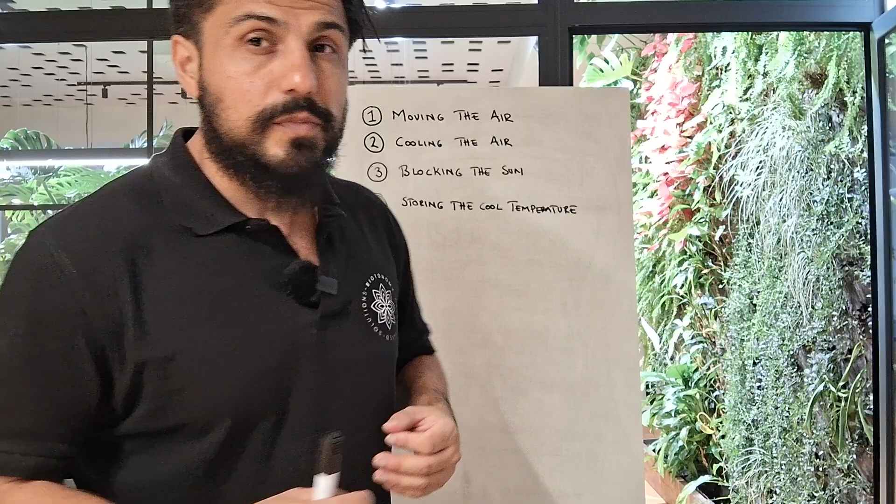The first thing we need to do in our design is design the building in a way that air can move. In conventional buildings, we use fans and ventilation to push the movement of air towards where we want it. But there's actually a natural way of moving air. So point number 1 is what I call moving the air. How do we move the air without depending on electricity and fuel?

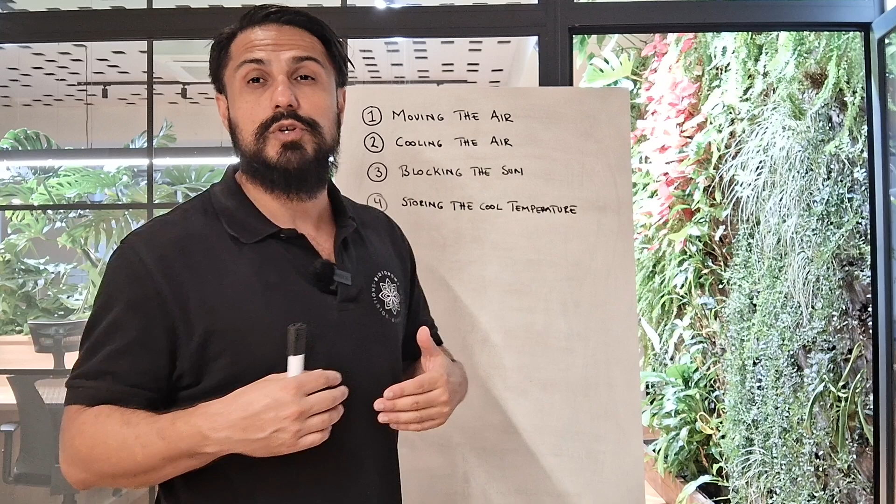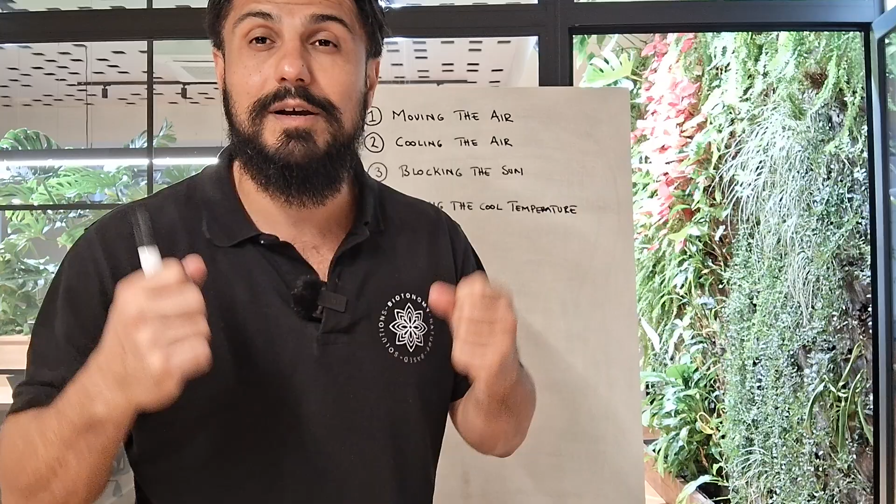The second thing we need to design is how do we cool that air that we're about to move. In conventional buildings, that air is cooled using fuel or electricity, so when it enters the building it is cool. I'm going to show you how you can do that completely naturally without using any electricity or fuel.

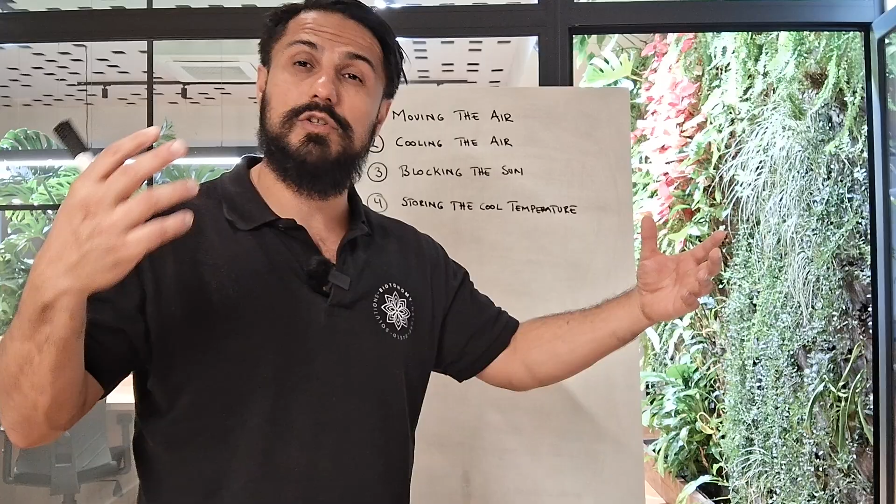Then we're also going to talk about how we design the building to actually block the sun during summer, because it's not only about cooling the air, it's also about minimizing solar intake during the hot seasons. So how do we design the building to do that?

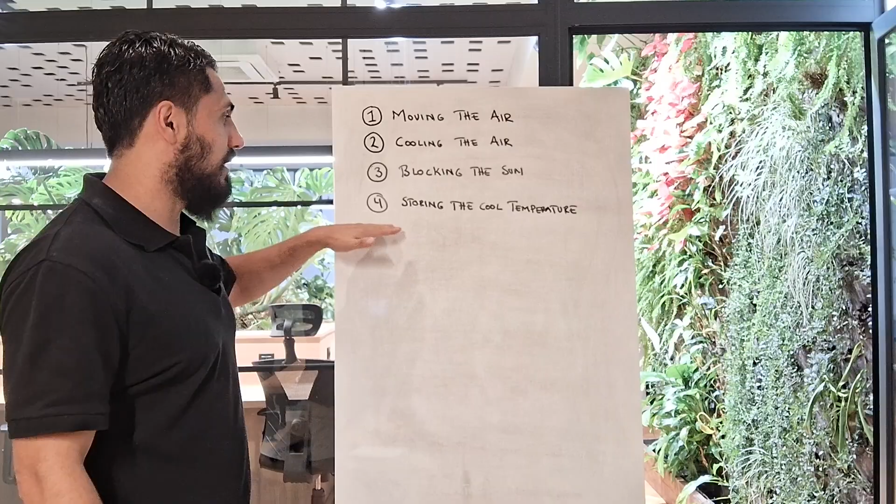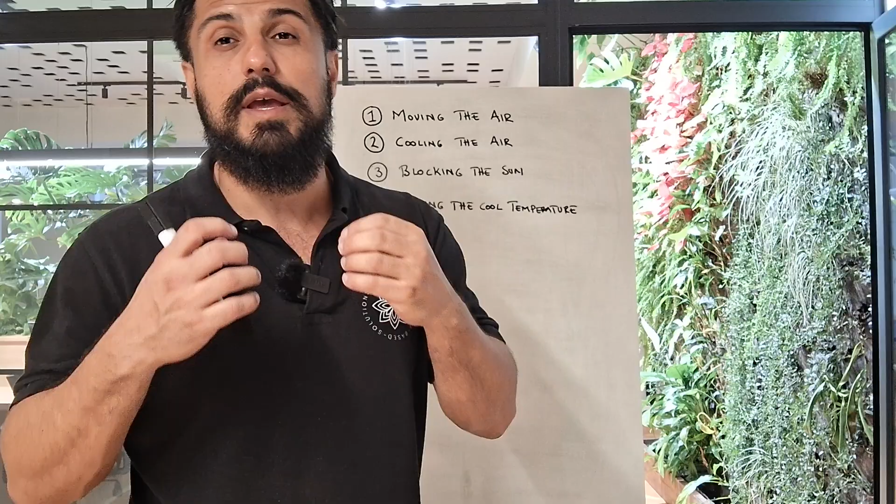And the 4th strategy is how do we store those cool temperatures that the building is now producing. If we don't store it, then we are constantly going to need to produce it.

So I'm going to show you a combination of using these 4 strategies in a building so you can completely cool it naturally. Let's dive into it.

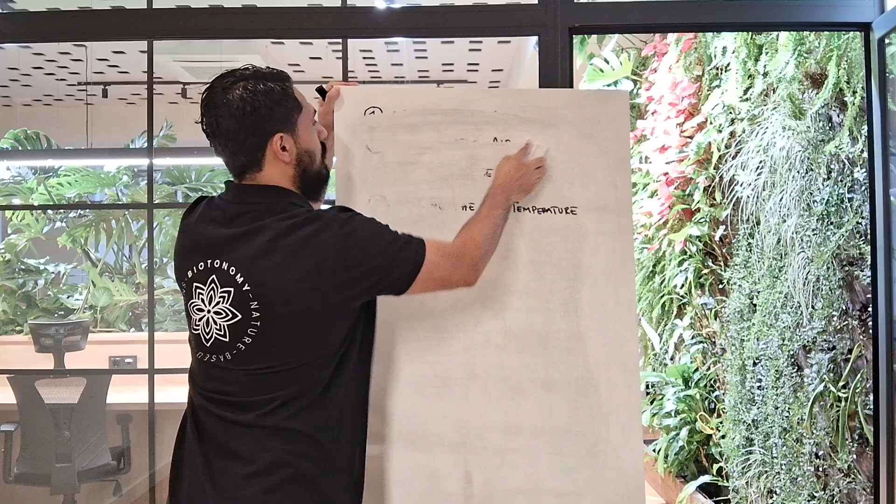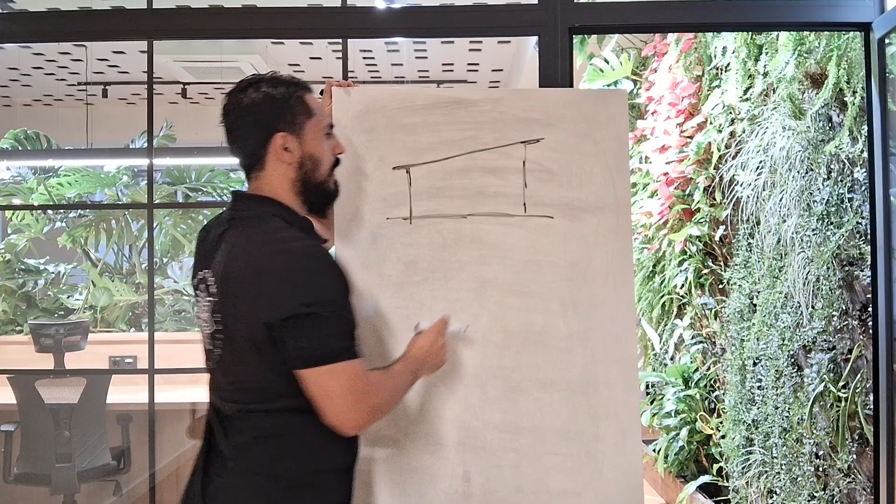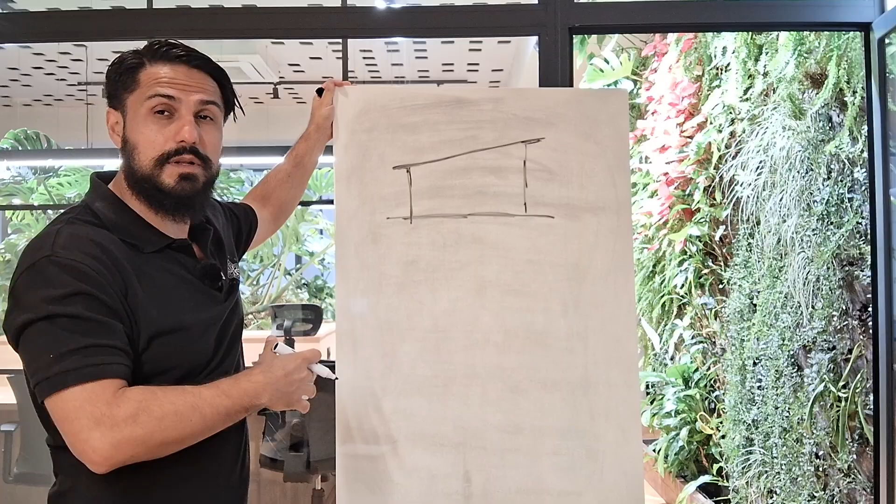Let me remove this so I can show you in a design. Okay, so let's take a building that, for example, has this shape. We do a simple 1-story building, and these strategies that I'm going to show you can be used in urban high-rise buildings in different shapes, but I'm just going to show you the concepts.

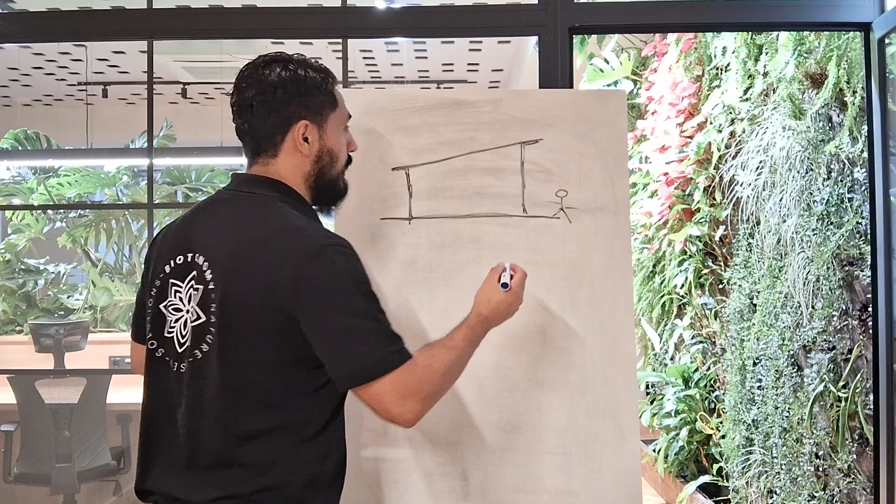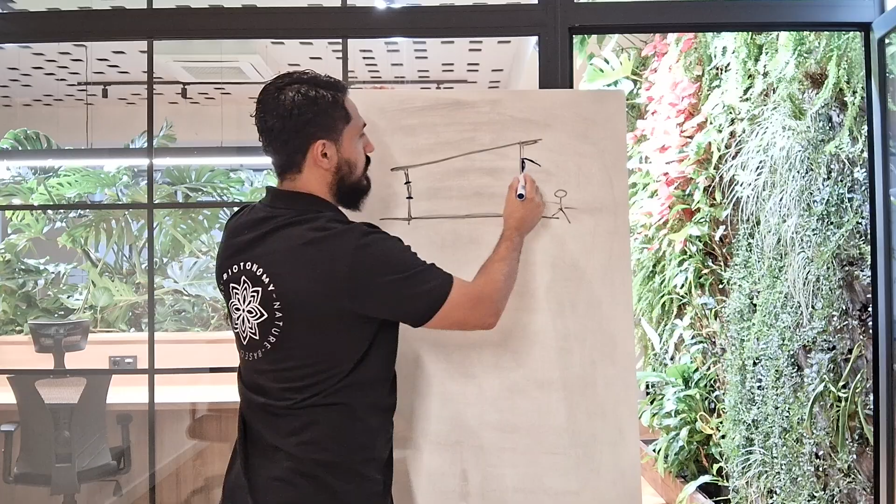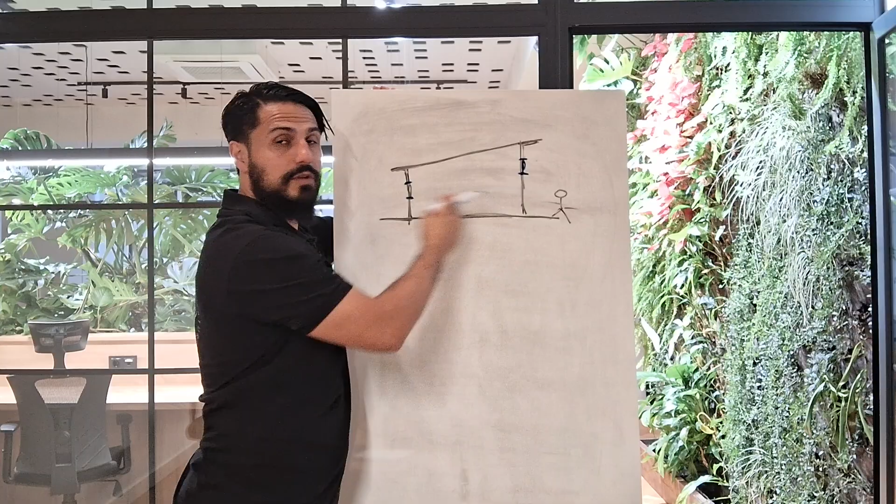So normally you would have windows in a building. If you have experience in a room or a house, if you open a window like this, and you have another window here as well on the other side, I'll just do it like this.

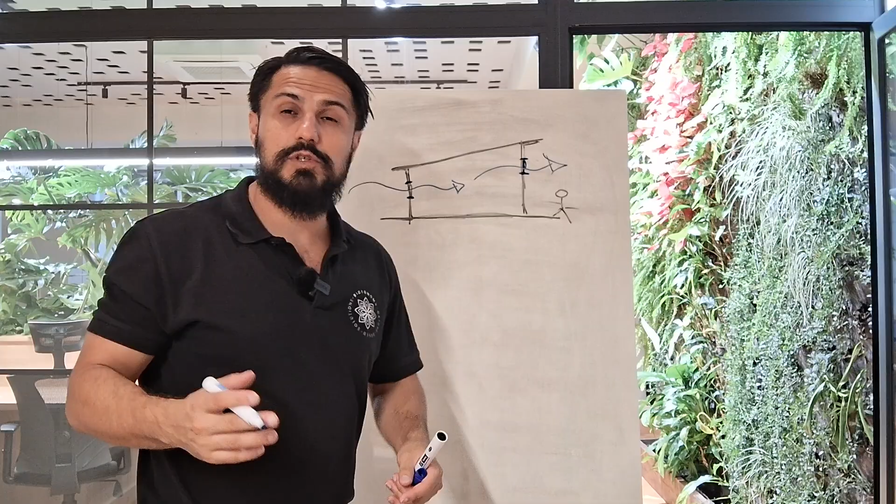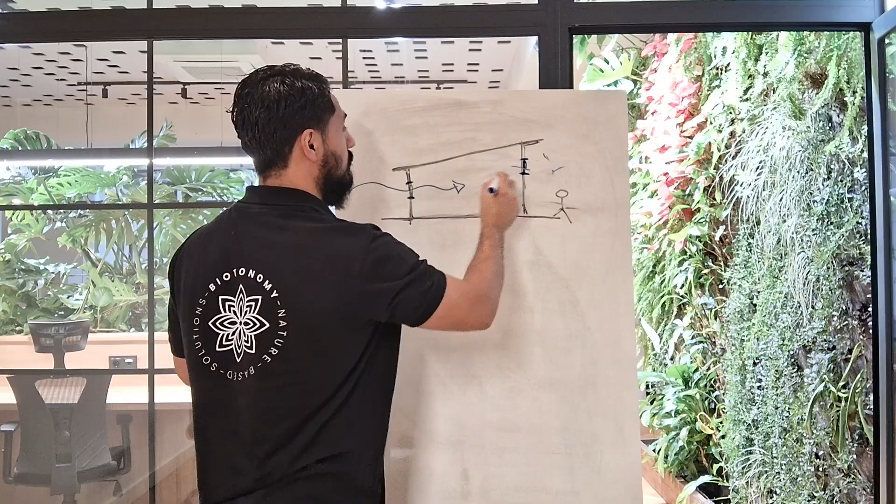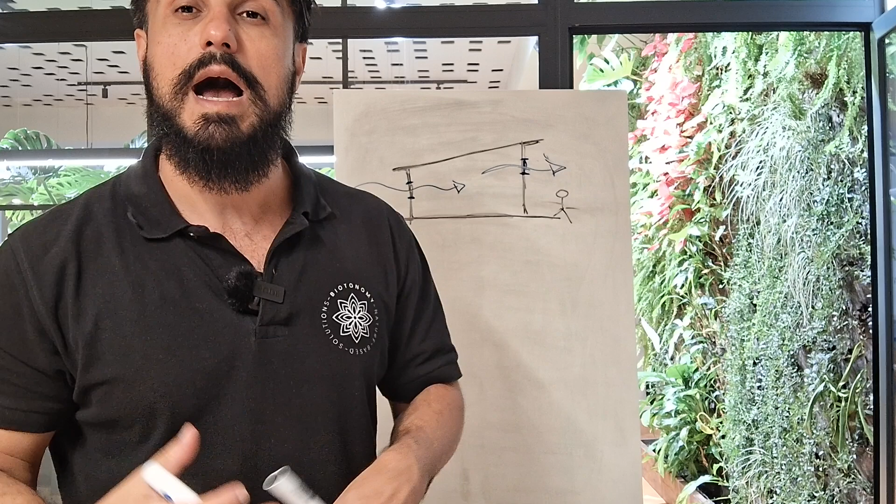If you've had this experience, opening a window on either side of the building, what happens? You get air flowing through your building, so it kind of feels like a breeze. Now that is, in simple terms, called natural ventilation. It's actually physics, because if you only open one, you don't get air to pass through your building, so you don't feel the breeze like that. So in order to make the air move, we need to have this in mind when designing: how do we create an opening on one side, and an opening on the other side, so that when we open these two, we have air able to pass through our buildings.

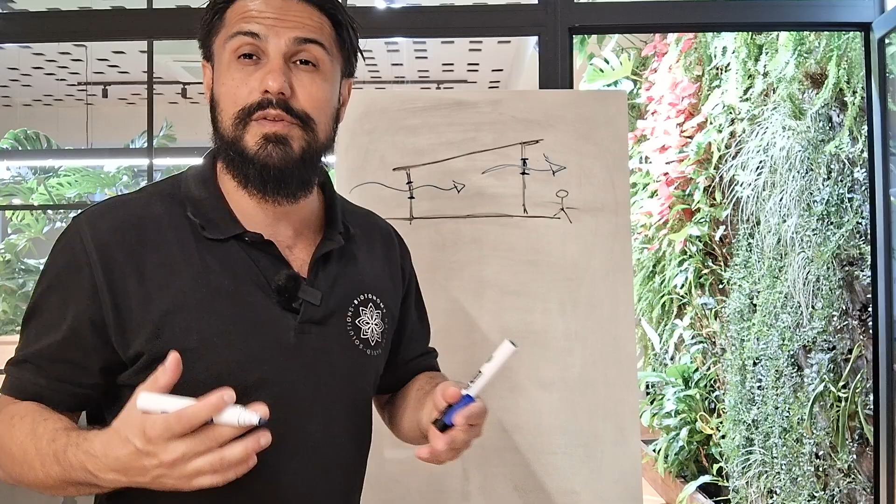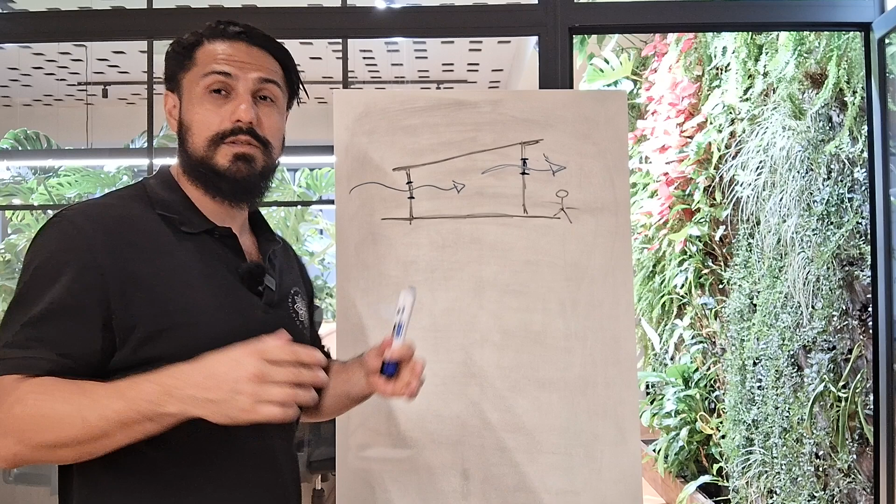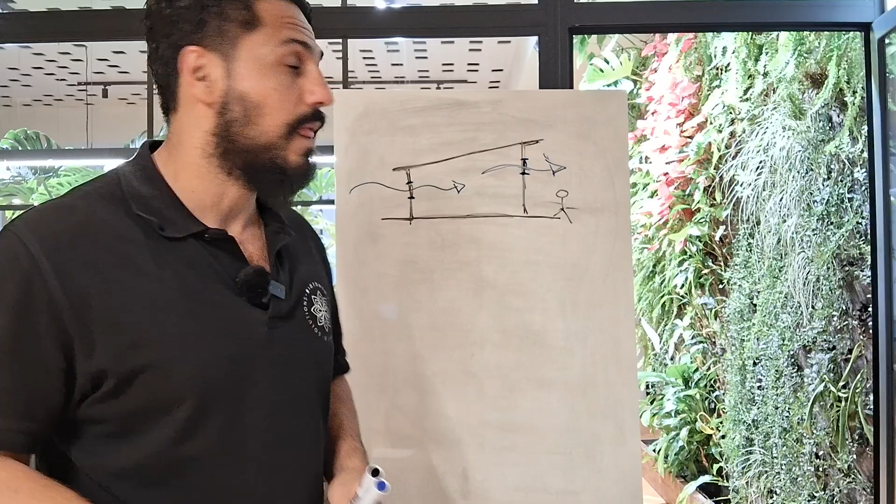Can you imagine that 99% of architecture just fails on this basic concept of having air flowing through the building so we make it breathable? So that's number one, how to make the air move. Very basic, very simple. You need to have this in mind when doing your floor planning, so you really think about where to put the openings. You cannot just put openings because of beautiful views or natural light, you also need to have in mind how do we create air movement throughout the building.

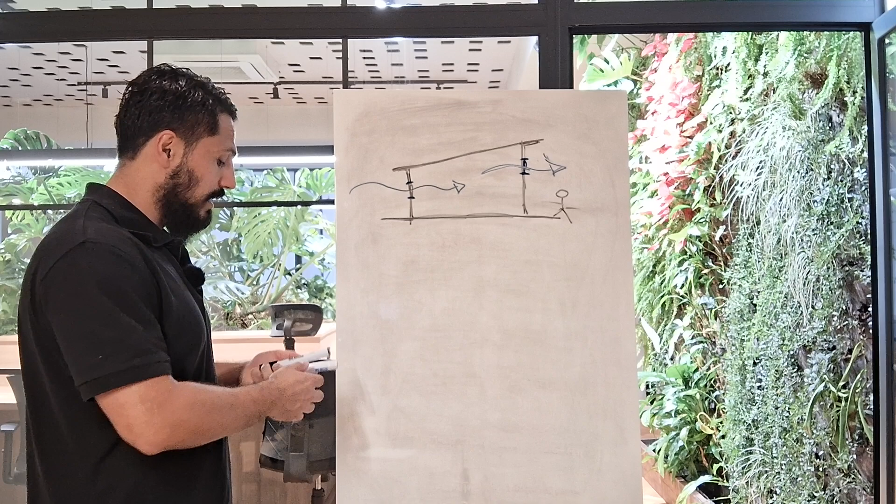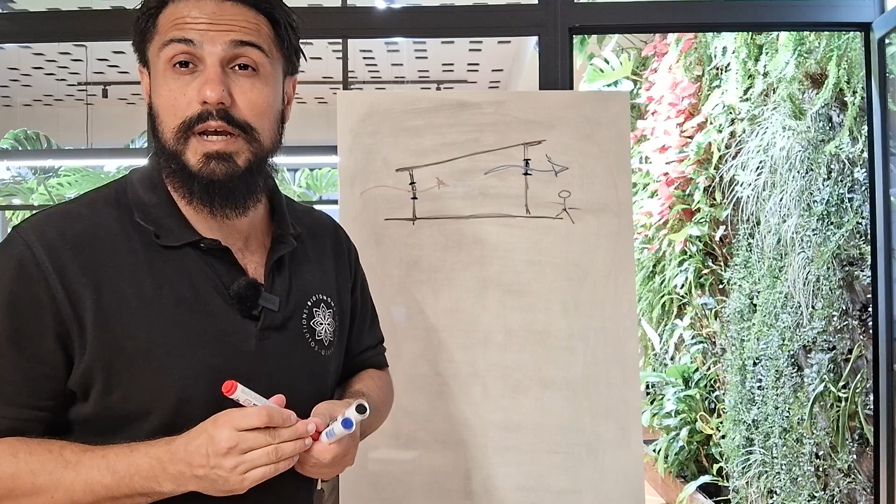Now let's look into how do we cool this air, because in summer, this heat and this wind, when it enters, it's not going to enter with comfortable temperatures. It will enter hot, and in fact it will overheat your building, and you don't want that. You want your building to stay cool.

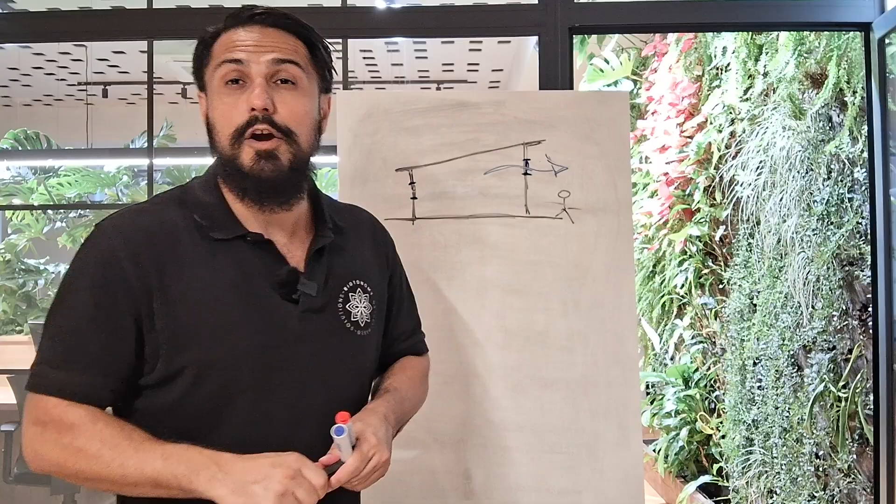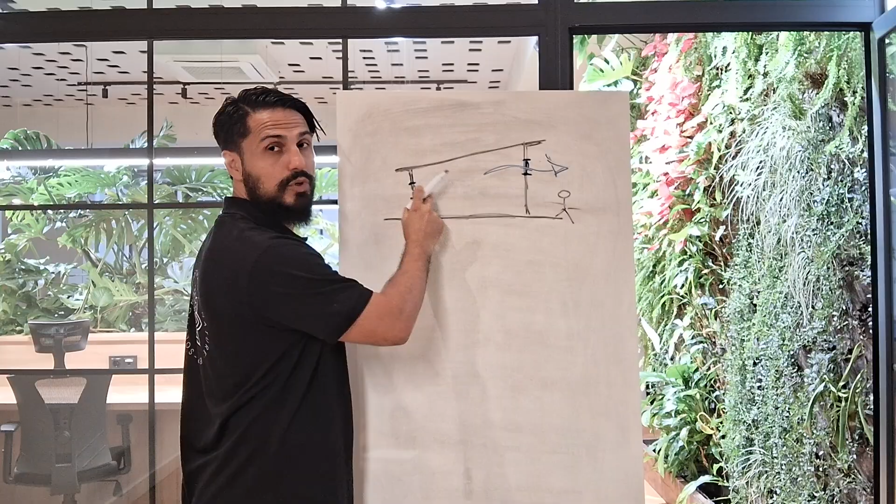So there is a way to cool the air, and it's called earth tubes. If you've never heard of this concept, it's a way of using the cool temperatures underneath the earth to cool the air. So instead of the air having to come from a window, what we can do is place what we call cooling tunnels underneath the ground, and you only need to go about 3 to 4 meters underneath the ground.

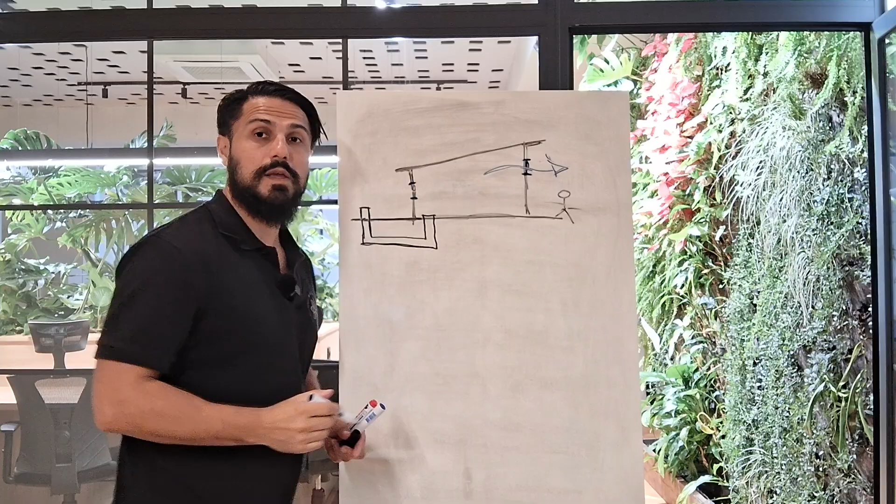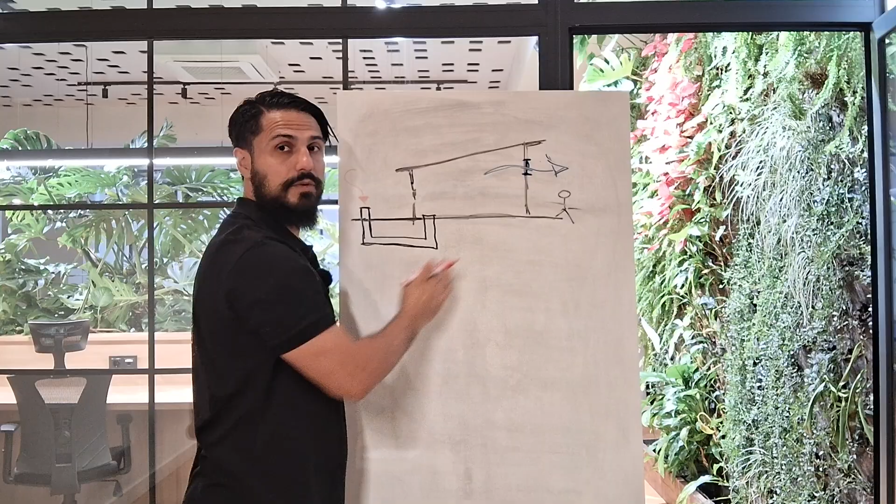So what happens is that when the hot air in summer passes by here - now, before I explain how to cool it, remember we still have this opening here. So when you open this window, air is going to be pulled from here, going through the building. So we've already achieved natural convection, because we have one opening here and another opening there.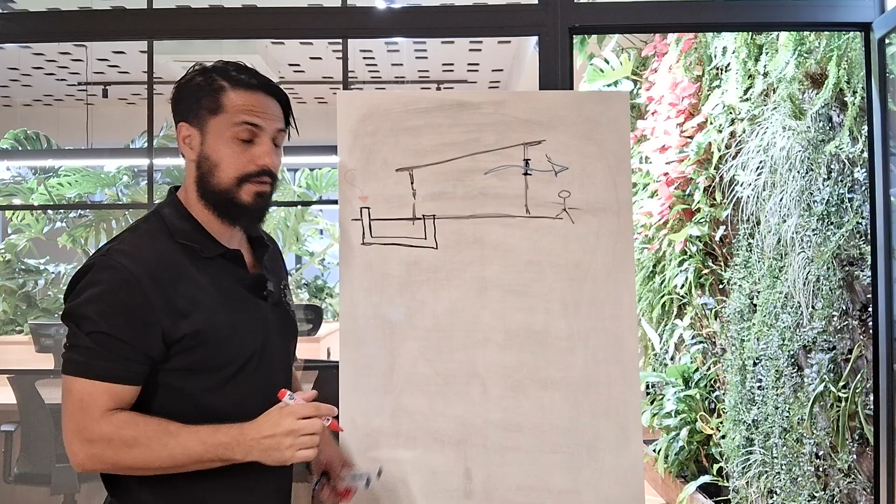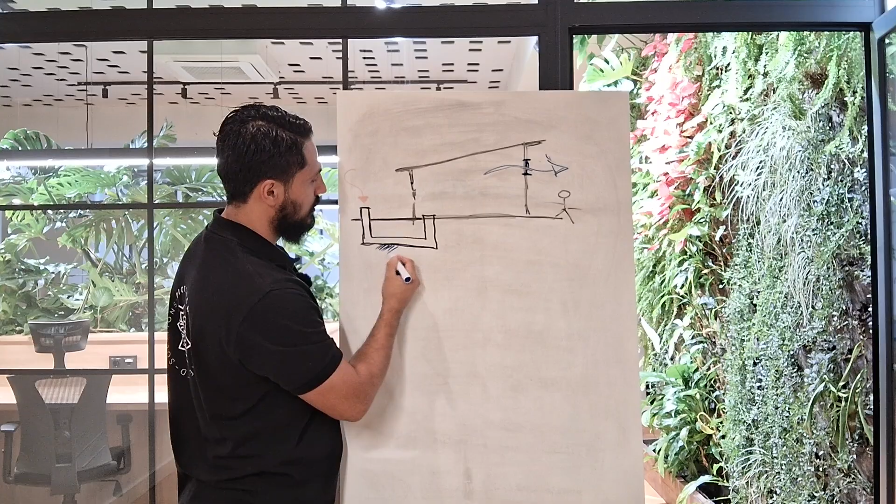Now, because we are 3 to 4 meters underneath the ground, the temperatures around the tube are actually cool, because the sun is not able to penetrate that deep. So naturally, when you dig down, the temperatures are cooled at 3 to 4 meters. The only thing the sun can heat is the top part of the soil, which stays warm because the sun hits it, but the rest is actually cool.

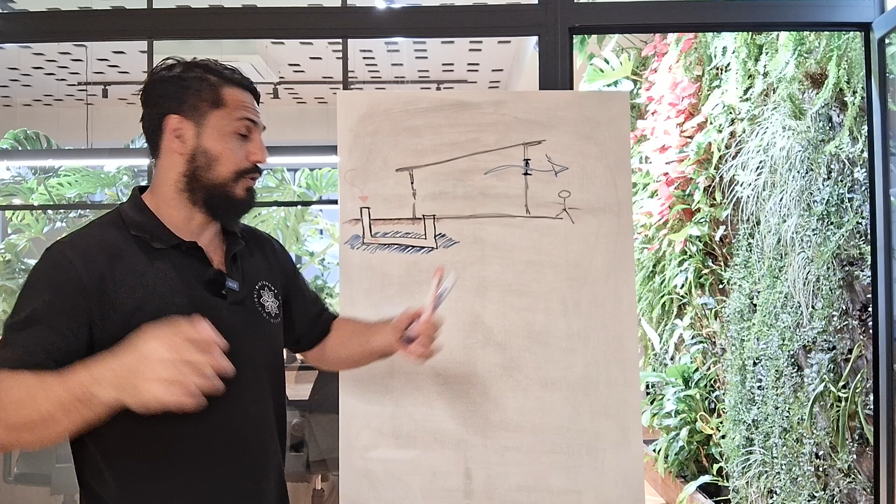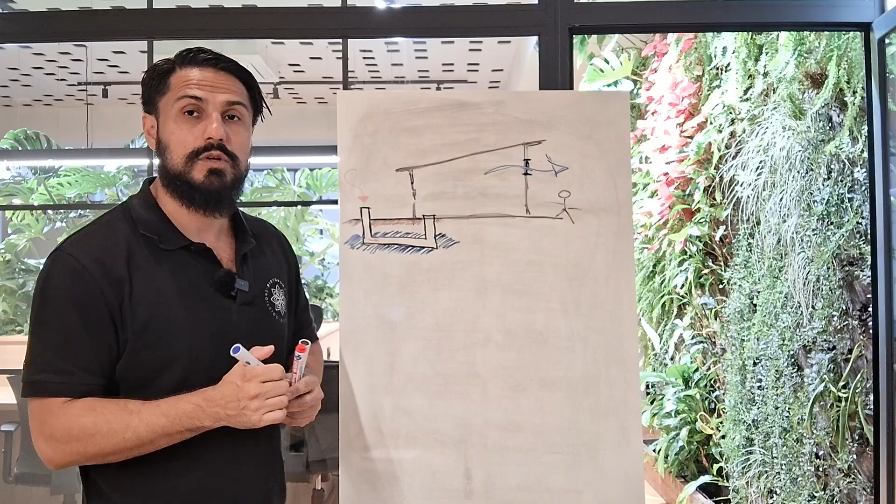So what happens is that as soon as this hot air reaches the lower point, it starts releasing its temperature. Why? Because based on the laws of physics, heat always moves towards cold. So the air that enters here in the cold area becomes cool because it starts releasing its temperature towards the cool area. And then eventually, when it comes into the building, ta-da, it's cool.

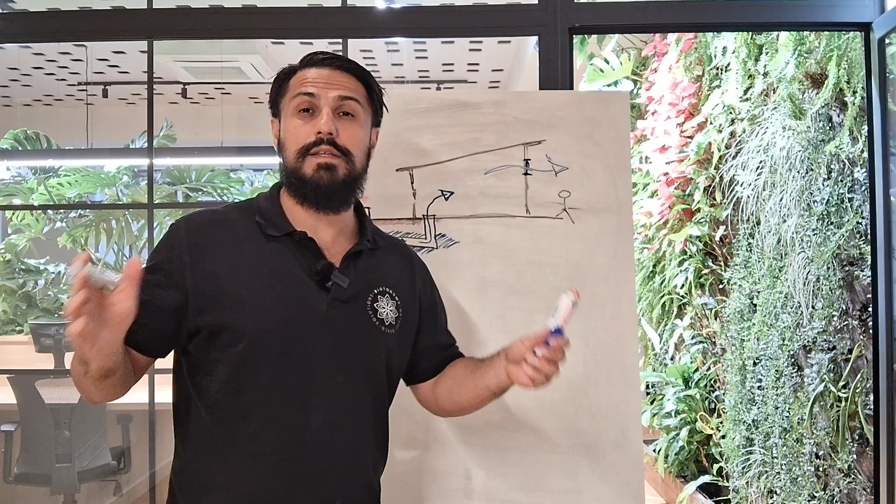It can come in at 19, 20, 22, or 23 degrees maximum, based on our experience. So now you've basically learned how to move the air by creating two openings on either side of your design, and how to cool that hot air during summer.

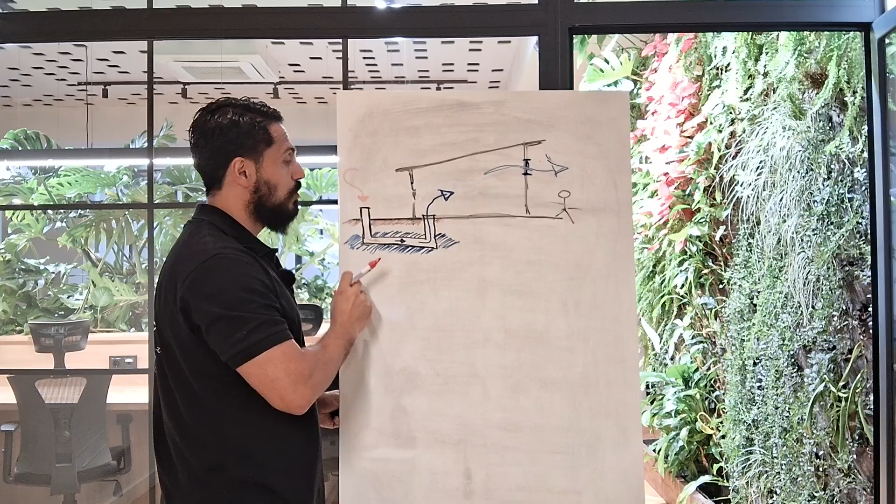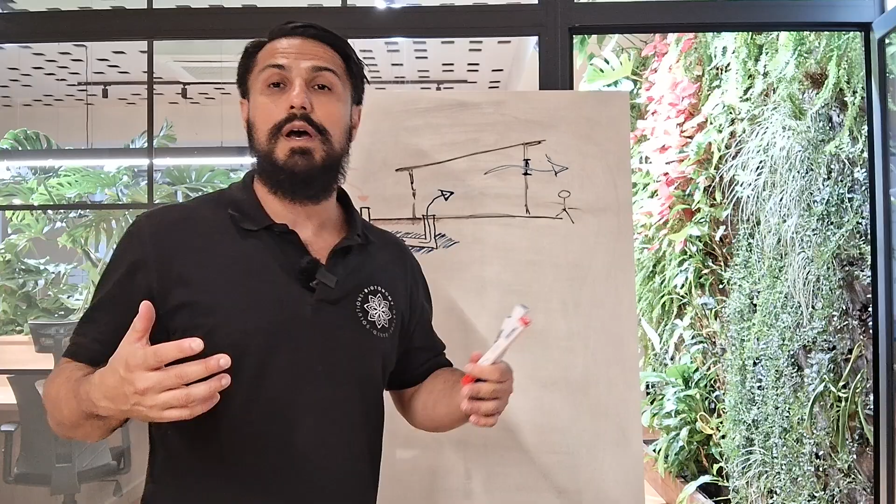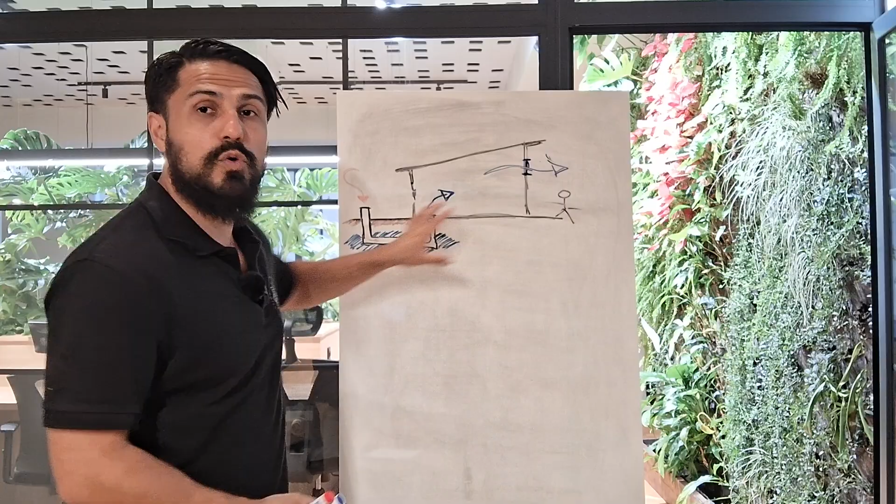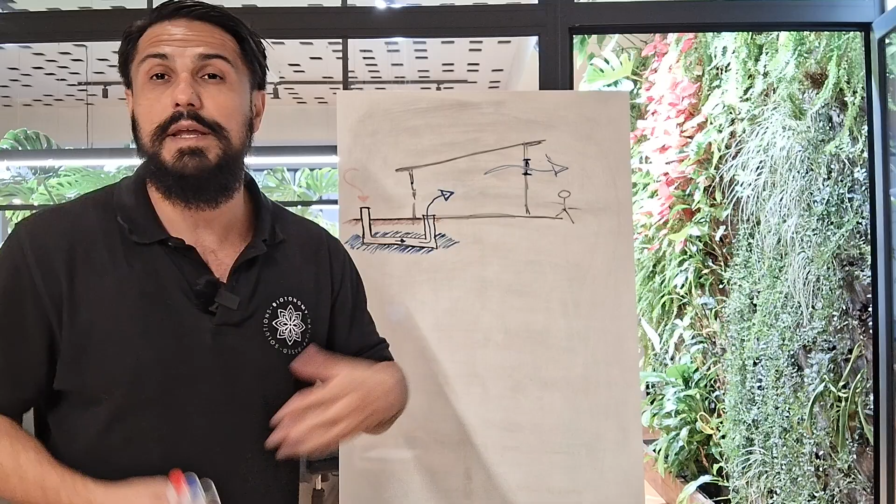So just by doing this, you've created a natural air conditioning system, because normally this whole process of moving the air and cooling the air requires electricity and mechanical components like fans, and they have a lifespan. They can have a 10 to 20 year lifespan depending on what products you're using, and then eventually they need to be maintained and repaired.

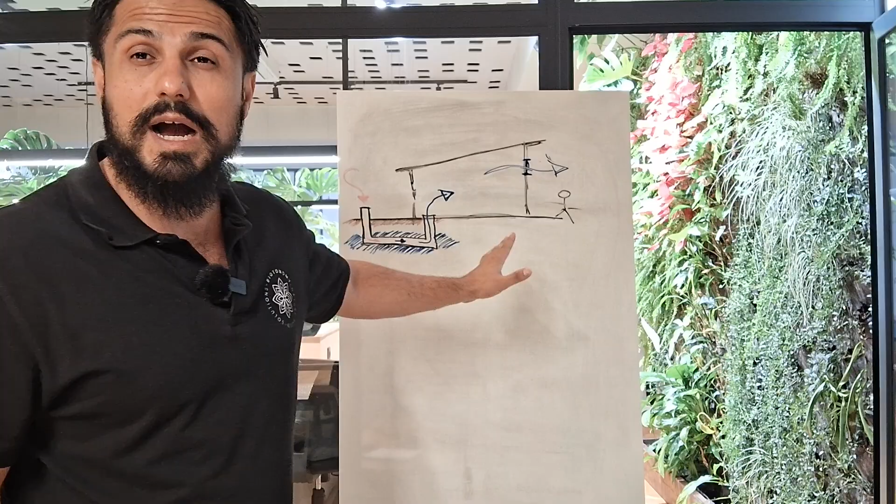But this is actually an ancient way of cooling buildings, and these systems were installed almost 1,000 years ago, and they still exist today. There are cities in the world where you can see these systems installed at a very large scale, still working after so many years. So this is nothing new - it's just lost knowledge that architects have forgotten, because most architects and engineers went to university, and there they were taught how to use air conditioning and fans. They were never taught how to use physics to cool the air. So now you know that, and you're already ahead of most designers out there.

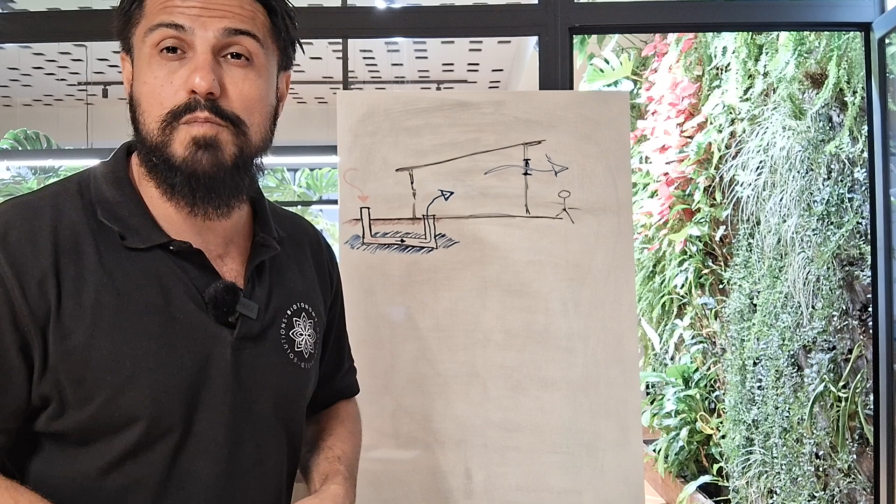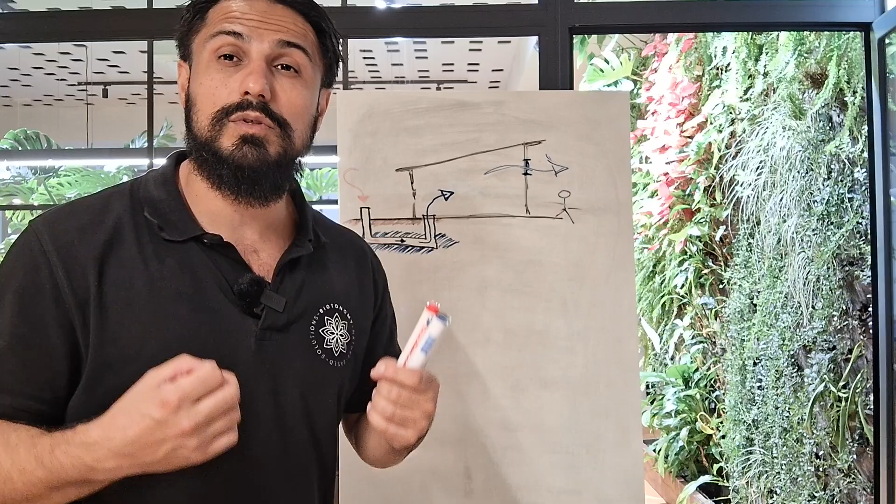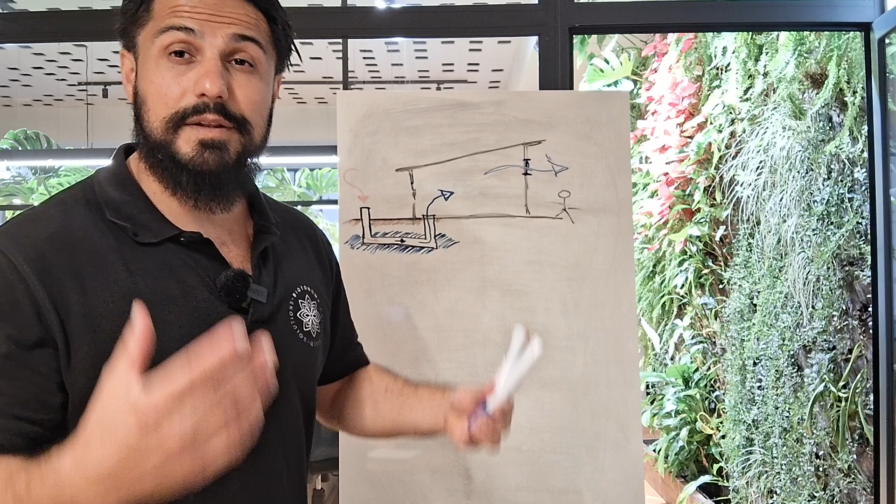Now, the third thing we want to keep in mind to make sure this is working is that during summer, we need to make sure we don't bring too much sun inside of our building, because on one side we're trying to cool it with the air, and on the other side, we need to make sure the sun isn't disrupting this process.

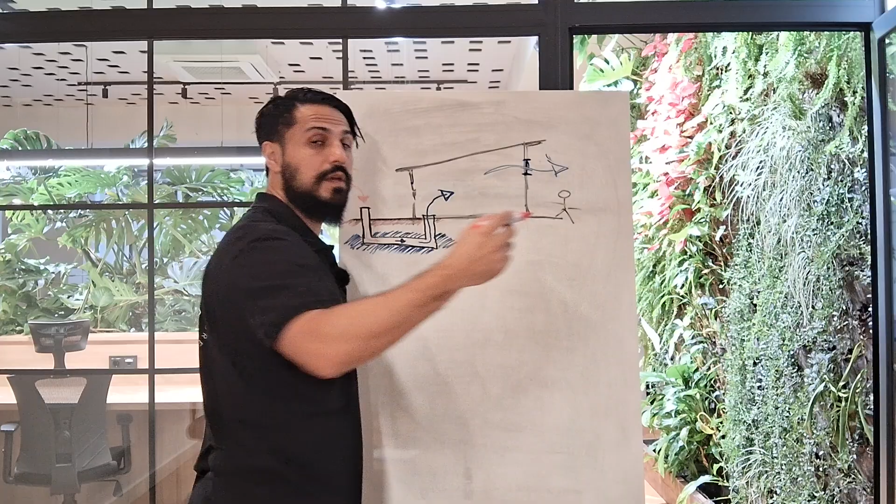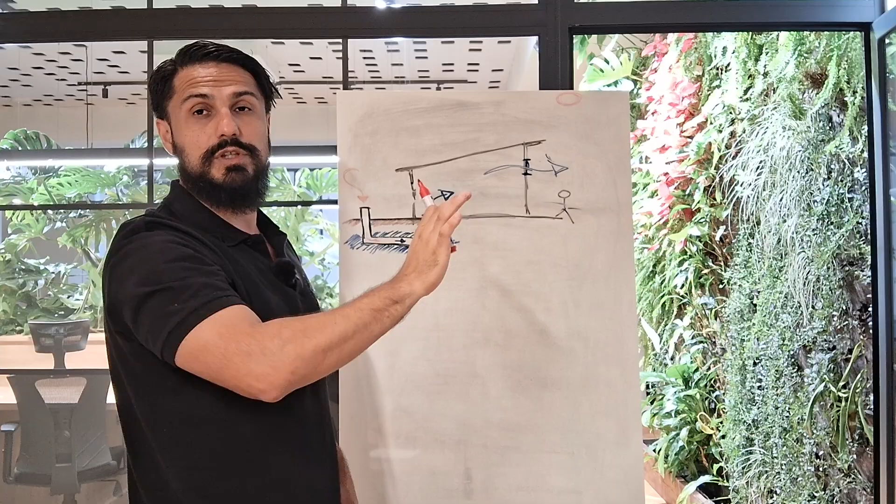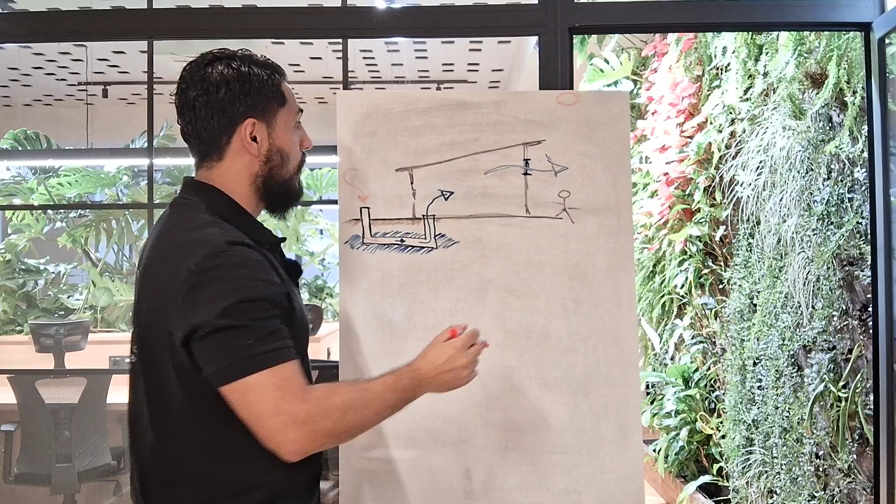The sun in summertime normally has a higher angle, somewhere here, while in winter the sun is lower, depending where you are in the world, but it normally comes into the building in this direction. If this side of the building faces the sun - which in the northern hemisphere is south, and in the southern hemisphere is north - then the sun will be getting into our building like this.

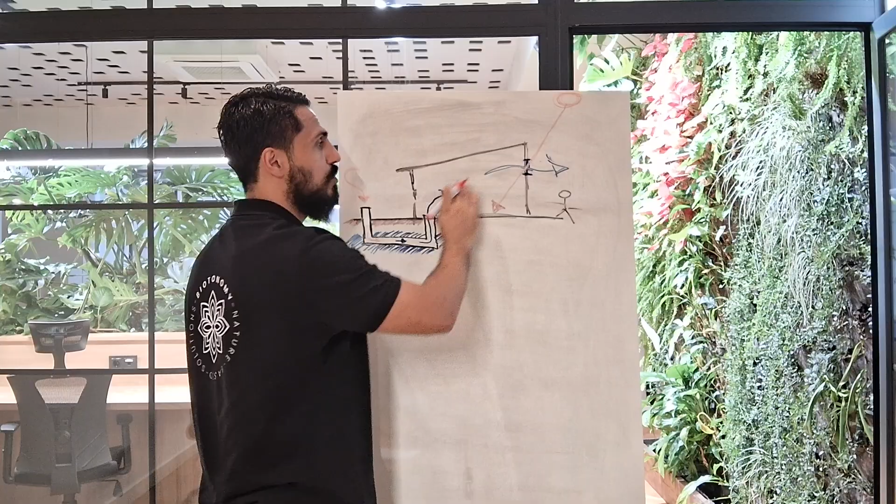Now there is a conflict here, because from one point you have created cool air to come inside of the building, and then from another side you have the sun heating up that air. So now your cooling system doesn't work, right?

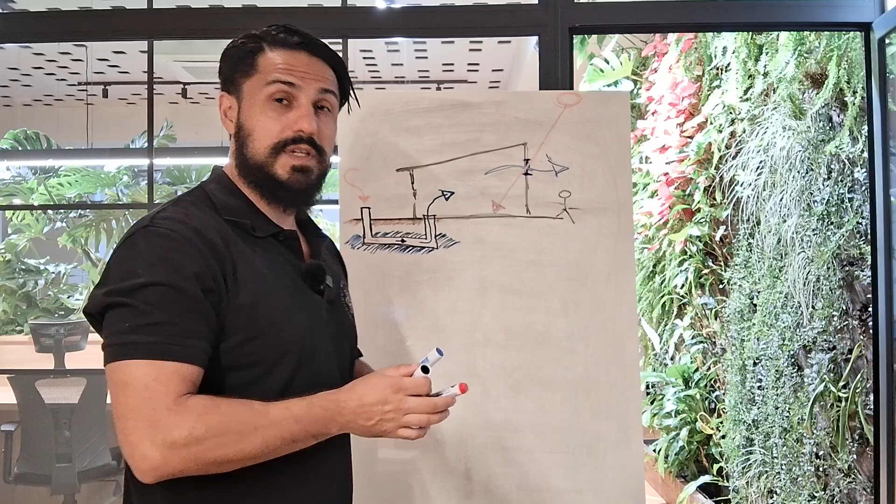So what you need to do is design your building in a way—and this is very simple to do today with today's technology and 3D modeling software—to make sure that the sun cannot enter during the hot seasons.

So all you have to do is figure out, for example, your roof here. How far do you need to extend your roof to block that sun? And you see, if we extend it like I did there, well, now the sun is not able to enter. It will basically just hit your roof, and everything beneath it will stay in shade.

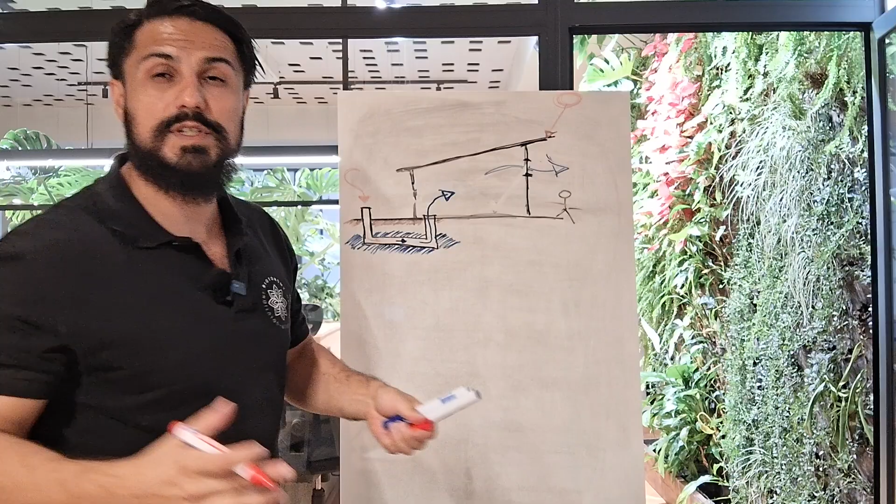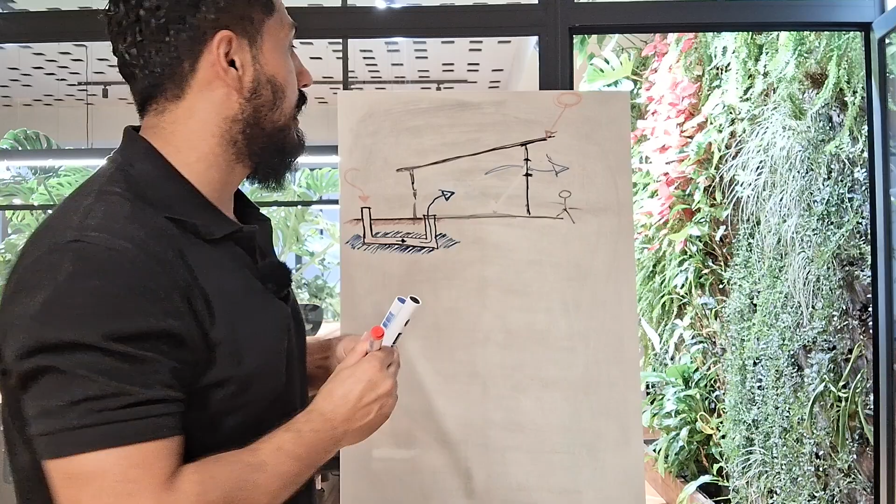That's a huge improvement in terms of thermal comfort, because the sun brings a lot of degrees inside. So just by being able to design the building correctly, we make sure that we don't overheat it with the sun.

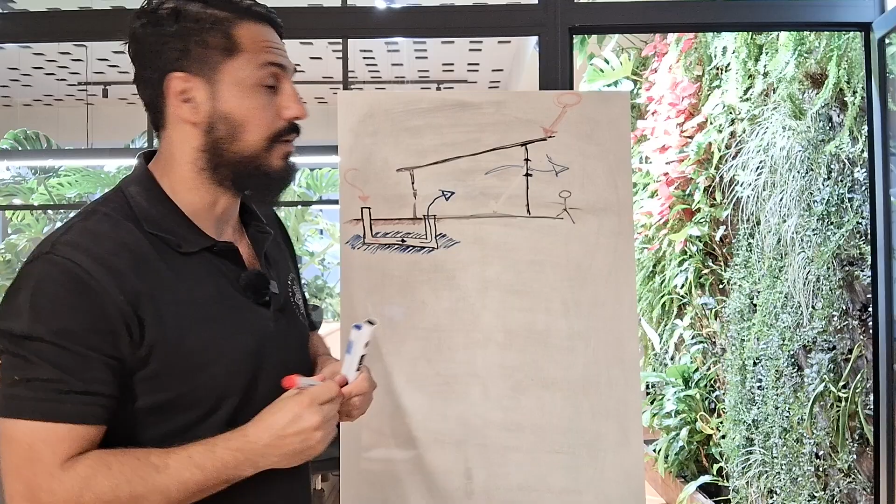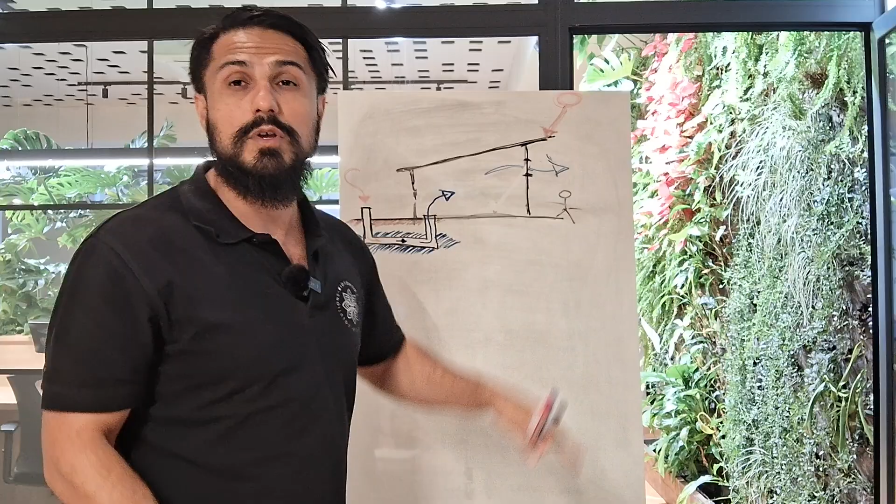So now we've achieved to keep our building in shade during summer. We've achieved to take the hot air from outside, cool it, and bring it inside. So now we should be good, right? Now we have cool temperatures in there.

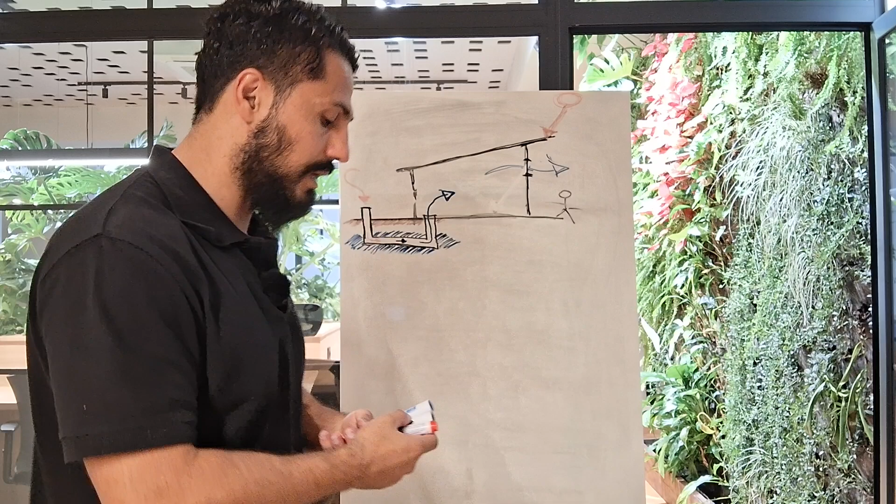Not really—there's one more thing missing, which is storing that temperature. Because eventually, during night, you also want to make sure—maybe you want to close your windows—that your building continues to stay cool throughout the entire day and night. So what you need to do is integrate a storage, a way to store this temperature.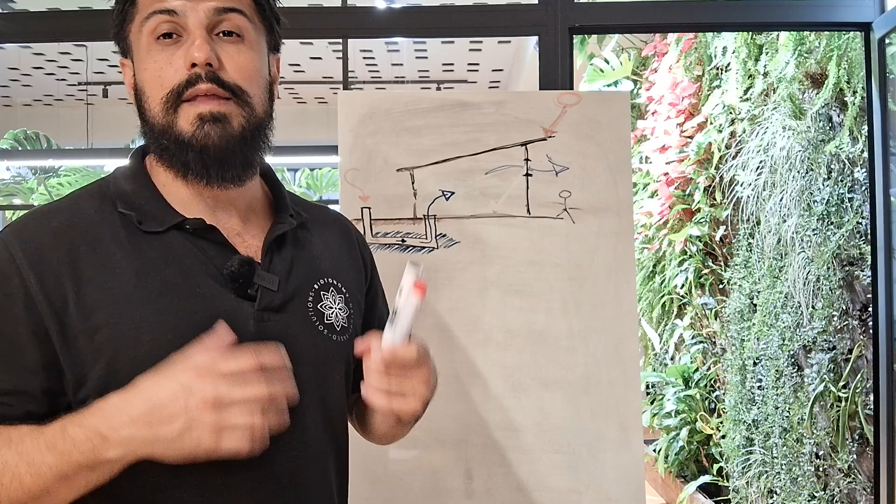And the way people have done this for many years, for thousands of years, is by using a concept that is called thermal mass. Thermal mass is basically nature's way of storing temperatures. You can store both warm temperatures and cool temperatures.

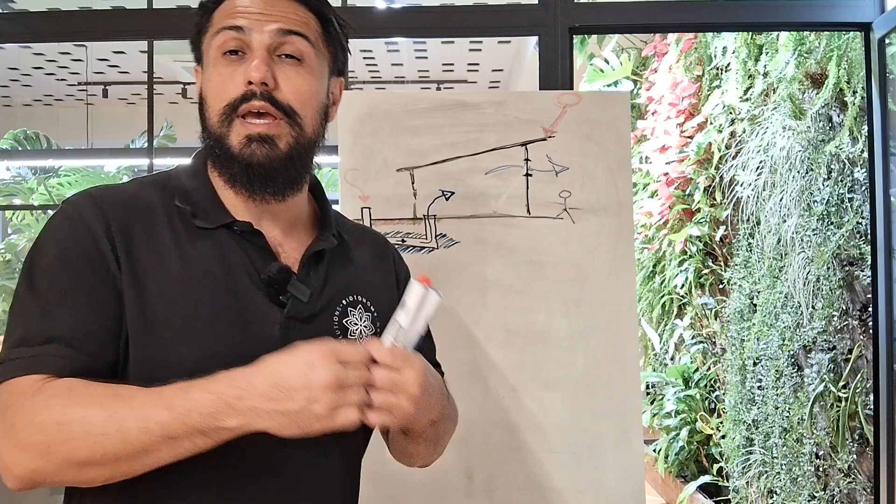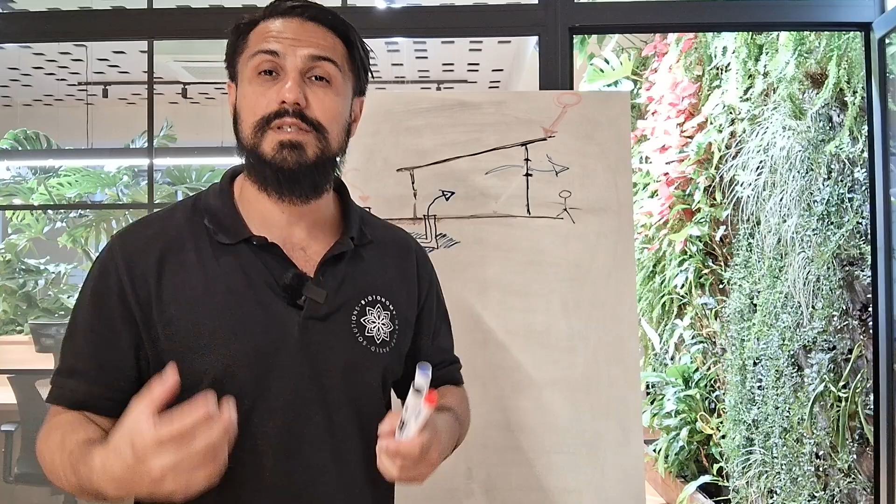And the way you can think about it is, have you ever touched a stone and felt that it was super warm? Or have you ever touched a stone and felt it was super cool? Well, that's nature's way of storing temperature. It happens in nature every day, all the time. Temperatures are stored.

Now, if we understand this concept and integrate it into the blueprint of the building, then our buildings can actually store temperatures. We can literally take temperatures from one season and use it for another season. We can take it from during the day and use it during the night, right?

So the way to do this is to use materials that have a high density. Materials with high density don't have pockets of air inside of them, or have less pockets of air. So certain materials that are heavier and more compact are better at storing temperatures. For example, if you take a piece of stone versus a piece of wood, the stone is going to be heavier because it has more dense mass, meaning it has less air inside of it versus the wood.

So the stone will be able to store temperatures. Same thing with concrete—concrete is basically humans' artificial way of creating a stone-type material, strong and solid. Concrete as well is a material with high density. Soil also has high density, especially if you compact it. There are walls built out of something called rammed earth, which uses earth in a structural way, and that has a high density. So there are a lot of alternative materials you can use that can store temperatures, right?

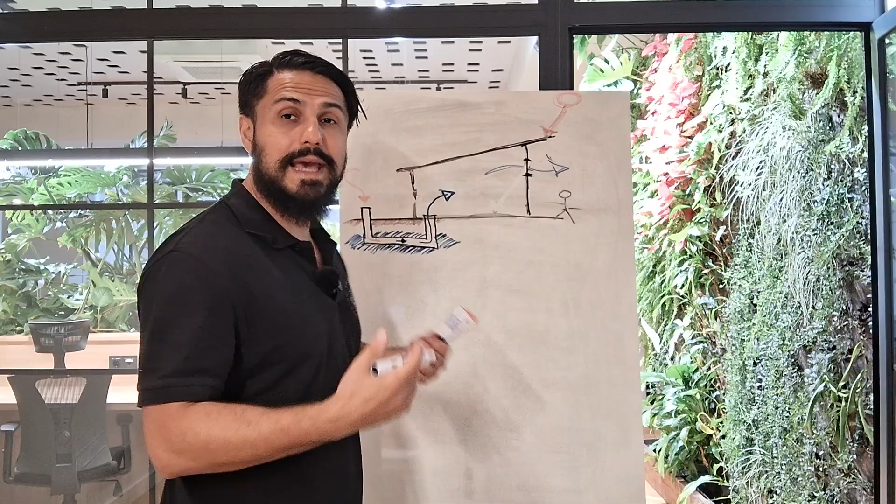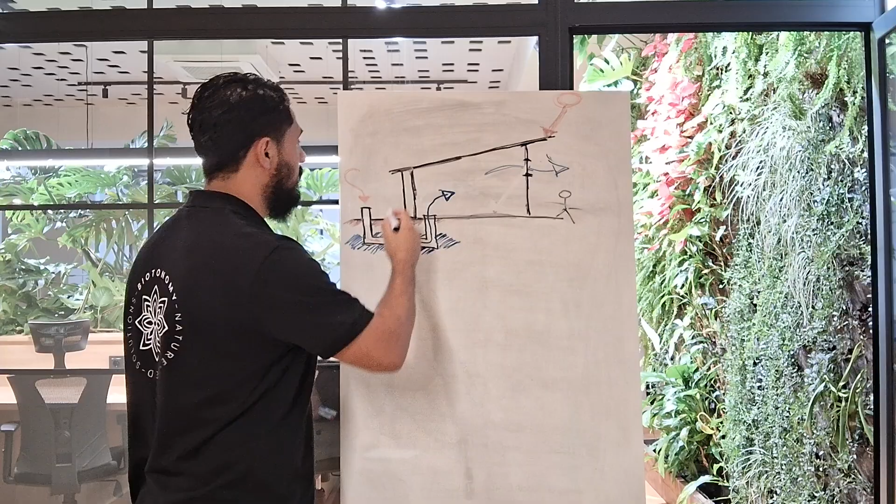So in your design, you would need to place those kinds of materials strategically. For example, in this building we've been designing, if we place thick walls here in the back, these can be stone walls, a concrete retaining wall, or a rammed earth wall—something with a lot of mass. And then also, if we make sure our floor has a lot of mass too, this can be a concrete floor or an earth floor, but not a wood floor, right?

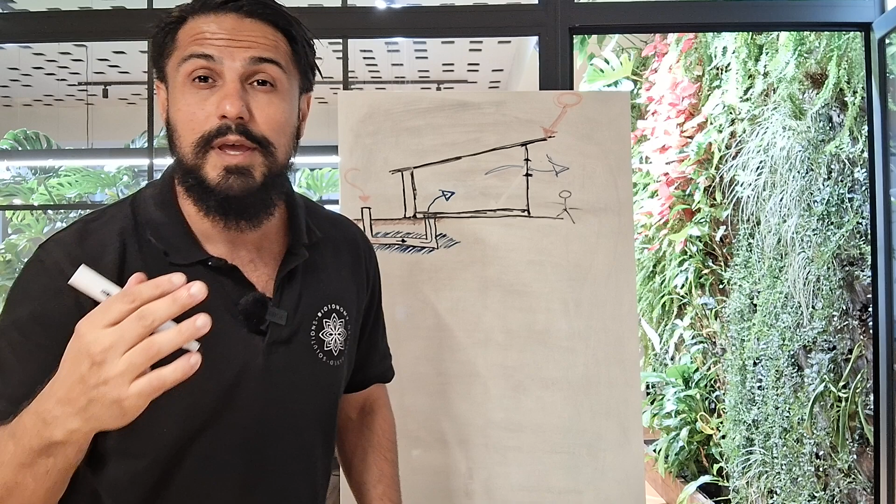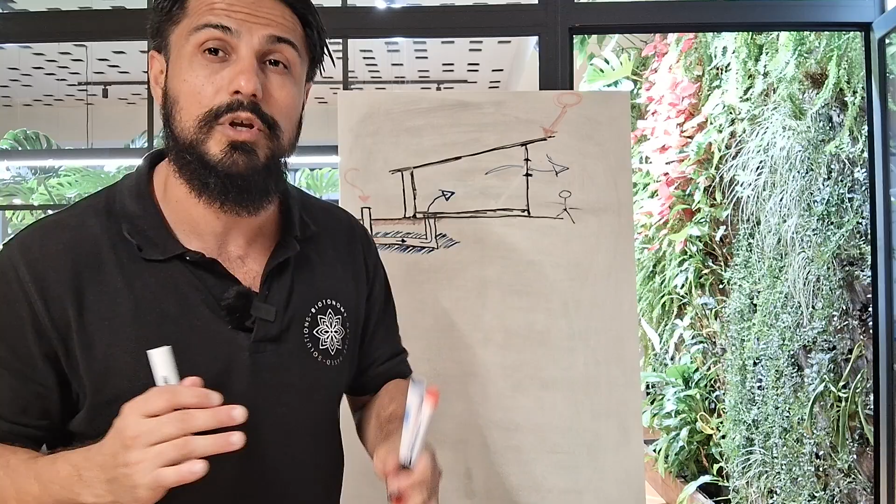Because wood doesn't store temperature. Same thing here—we don't want this to be wood, because wood cannot store temperature. You can use wood here, but where you want to store the temperatures in the back, you should not. So what happens is that all those cool temperatures created here get stored inside these materials. So this wall will basically stay cool, and so will this mass, because there is no sun heating this up.

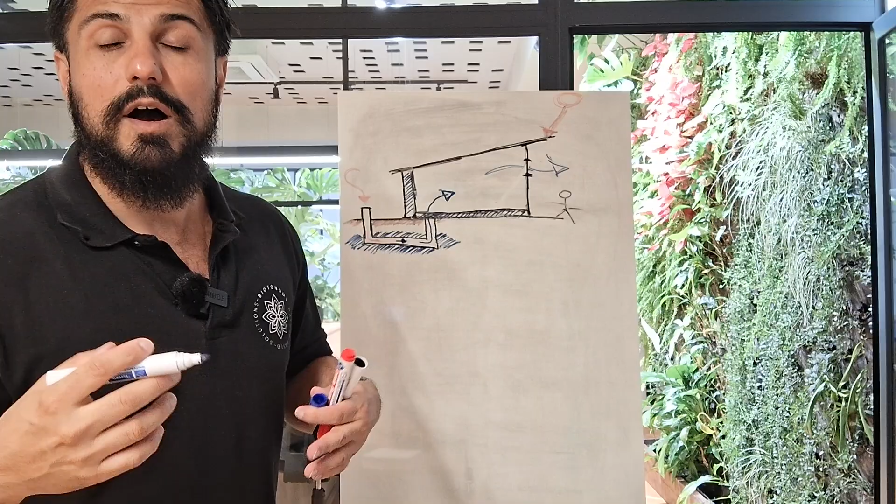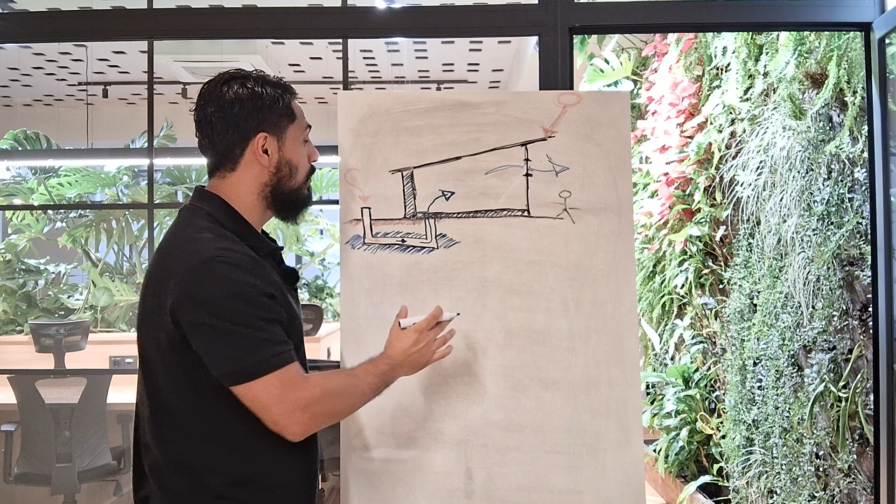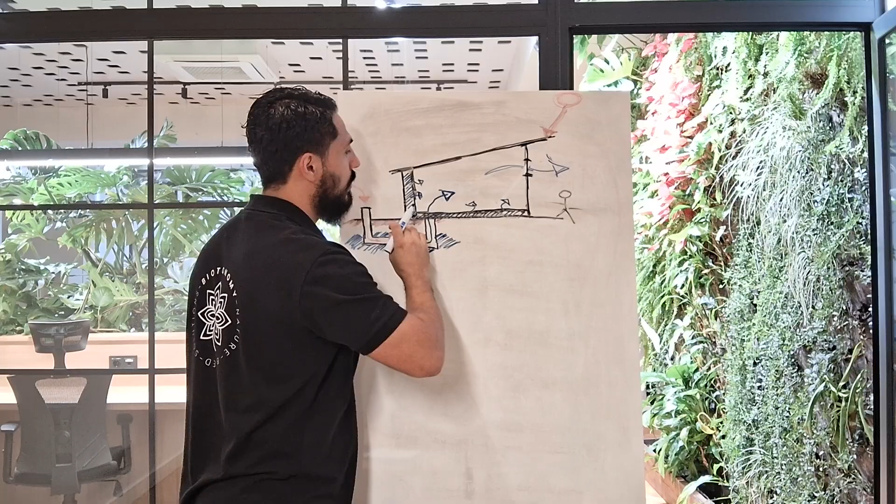It is staying inside, staying in shade during summer. So when it stays in shade, it stays cool. It will absorb these cool temperatures in the room, store them, and then radiate that coolness into the building. So now your wall and your floor are radiating cool temperatures.

And the air coming inside of your building is also radiating cool temperatures. So there you go, that's all you have to do. You just need to combine these four strategies together in your blueprint to get the building to stay cool. First, move the air. Second, cool the air. Third, block the sun. And the fourth thing is to store the cool temperatures.

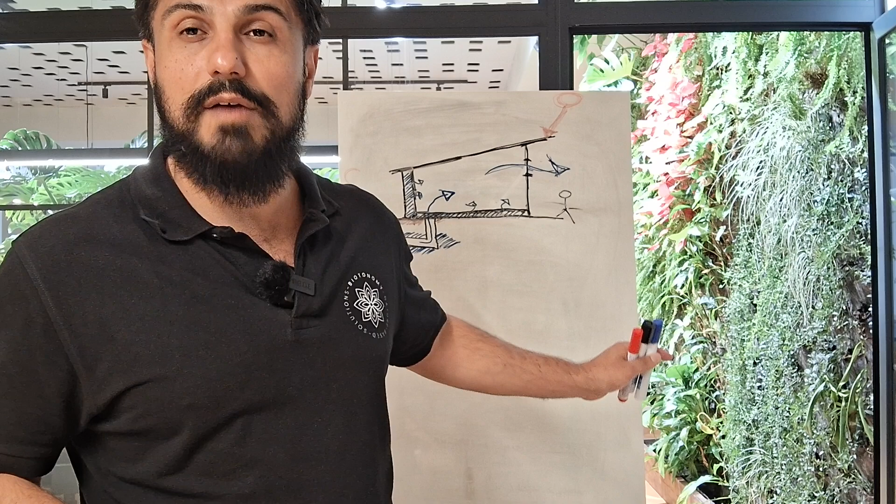We have done this in so many buildings around the world, and every time people walk into these buildings after they're built, we blow their mind, because people cannot believe that a building can be cooled like this naturally. We are trained as designers, engineers and architects, and we grew up in buildings constantly cooled with air conditioning systems. We've forgotten that if we use physics, we can actually cool our buildings.

And as I mentioned before, this can be implemented on a large scale. You can use these in residential blocks, office blocks, in urban areas, in supermarkets, in hospitals. There's no limit. It's just that we need to change our mind state of how we design these buildings, because if we don't take into account physics when we're designing buildings, of course they're not going to work with nature. They're going to depend on mechanical solutions.

The evil cycle we have with using mechanical solutions for cooling our buildings is that air conditioning really just takes the hot air from inside and throws it outside. So actually we're not cooling anything, we're just moving the hot air from one side to another. Now imagine hundreds and millions of buildings doing this. We are basically overheating our cities because we take the hot air from inside and throw it outside. Now our streets are uncomfortable.

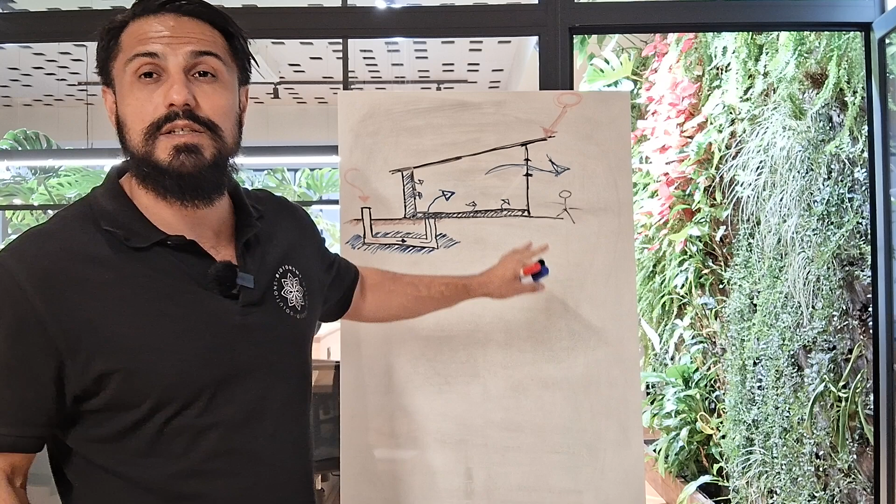So if you really want to master green buildings, you need to understand that there is so much more than just making these buildings green. There's all this physics and biology that you need to learn to integrate into the building. And if you really want to know how to design buildings like this, if you really want to understand the details behind it, like what kind of materials should you use for the cooling tunnel.

What kind of dimensions should you use, what do you do in different terrains, how do you integrate the cooling system, how does the storing look like - all of these details is what we teach you inside of the academy. So if you really want to make an impact in this world as a designer, a builder, a policymaker, if you're working with construction, with cities, then you just have to learn this, because this will help us to really change our cities, improve our buildings, and create environments that actually work in a healthy way.